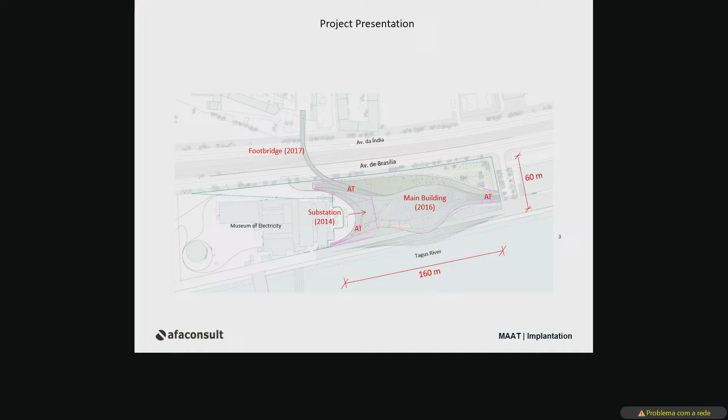So the first project I'm going to show you is the Museum of Art and Architecture, the MAAT, done with the office, the London office, AL_A.

And something happened. Maybe it's the idea that is not... well, clearly something happened.

Finished? Well, thank you very much. You can... Something happened, but I don't know what it was. Is it my computer that's not working?

This is... Okay, now it's showing the wrong one, but it's okay. Yeah, but it's showing the... Okay, no problem, but well, you will see it anyway, so okay, let's do it.

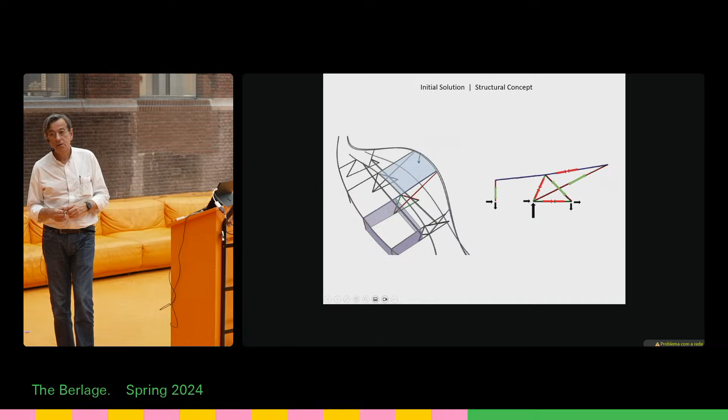Obviously, Amanda was not happy with the columns in the center of the room, but there was not any alternative, so we decided to study a different approach. We proposed to have a big truss in that alignment, a curved alignment, and with that big truss we could take out the columns of the room.

Everybody was quite happy with it, and we were also happy with that achievement. So this was the big truss in front of the building and the room with no columns.

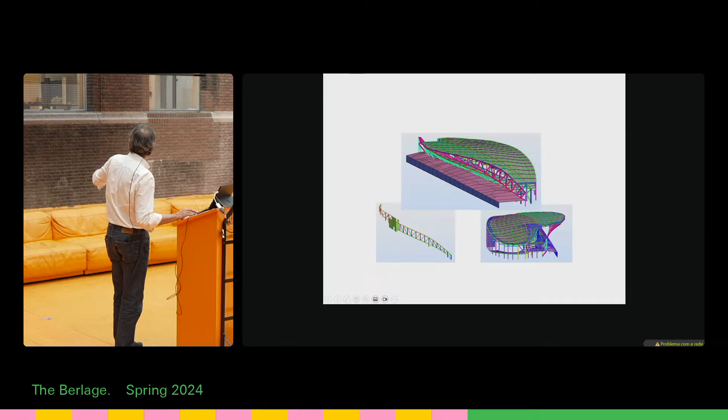But afterwards, they did the renders and discovered that the truss was in fact the teeth of the shark. Everybody began saying, oh my goodness, we can't do that, it's too obvious. And they said, Christ, what do we do now, if not even the teeth of the shark are allowed, what can we do?

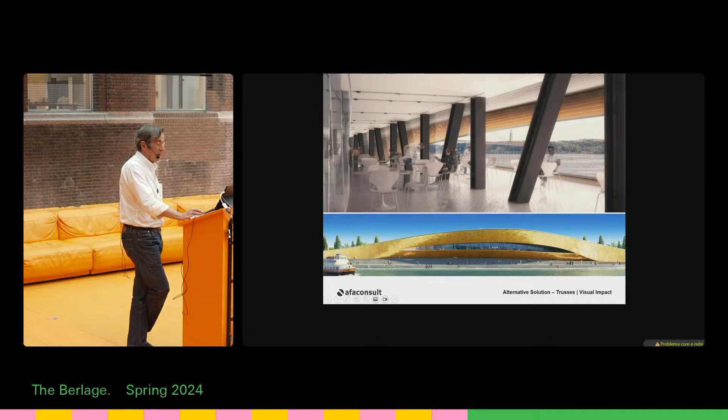Then we began again, and with the shape we discovered that there was one place where we could use an arch, a big arch, that could take care of and support the cantilevers. This is the architect's interpretation, but actually it's more than that - really to see if it fitted in the shape and if the shape would need something.

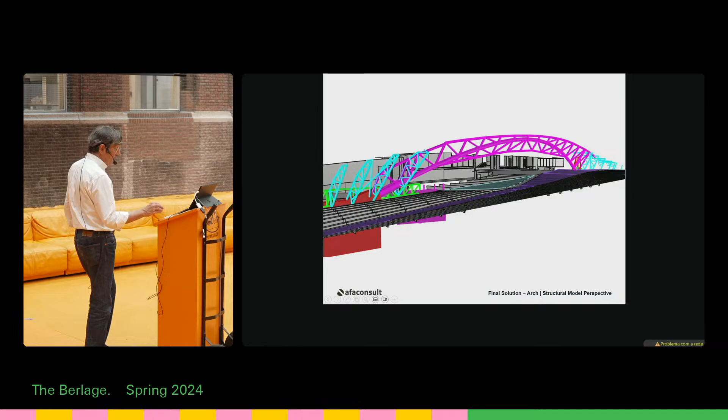And that's how it was done at the end, with this big arch. You will see some pictures afterwards. With this big arch, by changing the structure that way, we were able to free the mouth of the shark, and of course the interior, of any supports.

So this is a section done in the model where you see the oval room with no columns. The only support that we have is this one, and then you have the 25 meters span until the bottom of the cantilever. So this was the main thing.

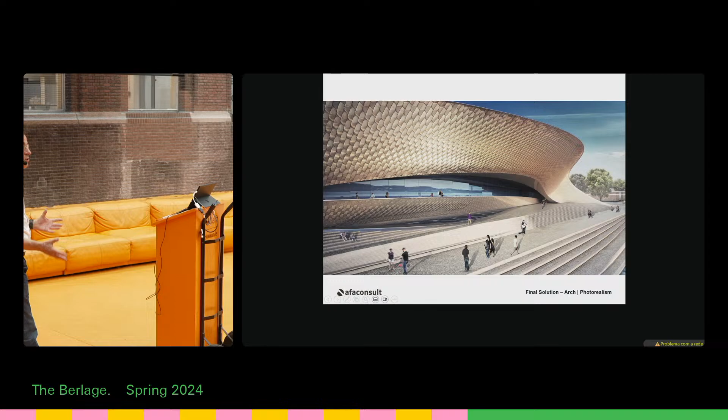Of course, a building with such a geometry is always a big challenge because geometry rules everything. But because of the height of the structure you need to do such a thing, services are not a problem - they fit everywhere, so it's not a big deal. That's why they're not represented in this presentation.

Well, this is just for you to have an idea of how the technical drawings needed for the arch, and some pictures of how the arch has been built. Such an arch, as you have seen, is around 85 meters span and 14 meters of height.

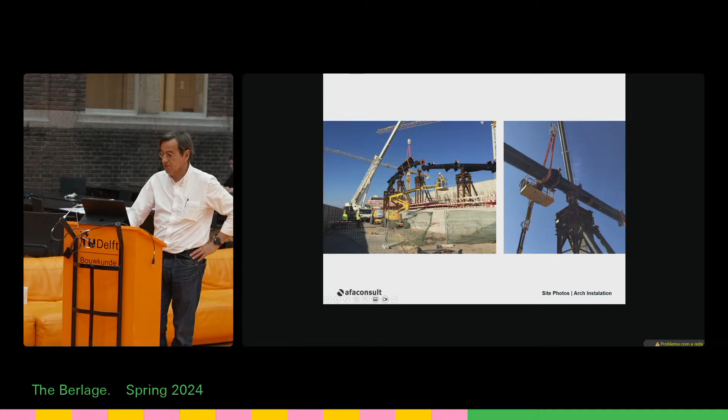So it's big. To build it, you need to have temporary supports that afterwards allow you to connect the several segments of the arch. And here already the arch, already being finished. The other challenge here in this process - okay, some more pictures.

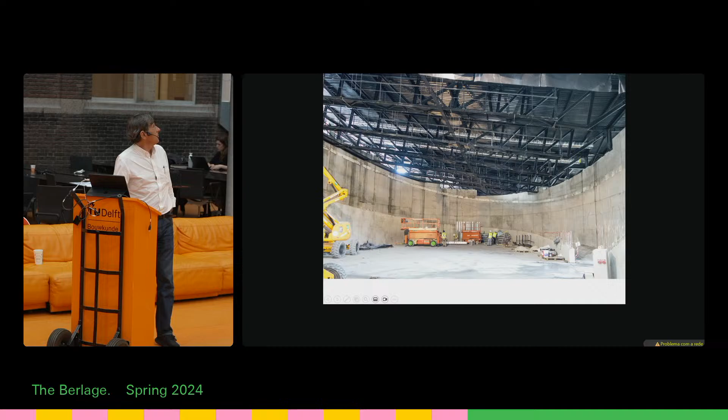I will go a little bit further. And the arch here - this is the interior of the room during the construction and finished at the end. This is another room, beside the big oval room, which has also that skylight, and that was also something interesting from our point of view.

The other part that was interesting here was the facade, because this smooth facade would need a material that could do the facade without many cuts and things. So it's a ceramic facade, and the problem with the ceramic facade is that it requires a very specific structure to support it - those small structures are all the structure that makes the first approach to the surface.

The surface - you get that surface in several steps, if you want. You first have the big structure, then you have a second structure that approaches the final surface, and then with the tiles and the regulation of the tiles, you get the final surface.

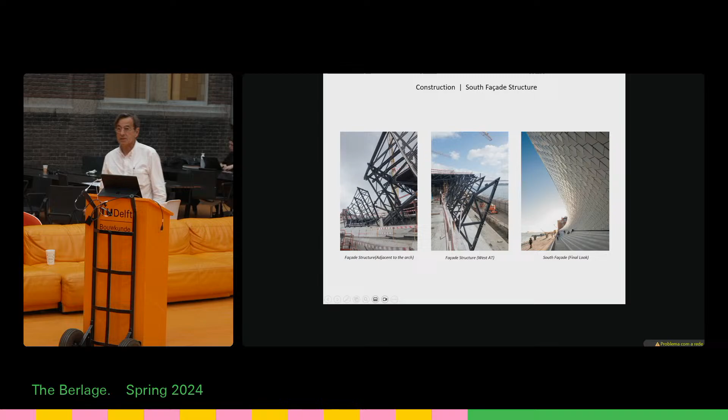That was it. So here, just for you to have an idea of the facade structure, which is massive, as you can see - not so strong, but massive in terms of needing a lot of points to support those tiles. Okay, some pictures of the rest, and that's it.

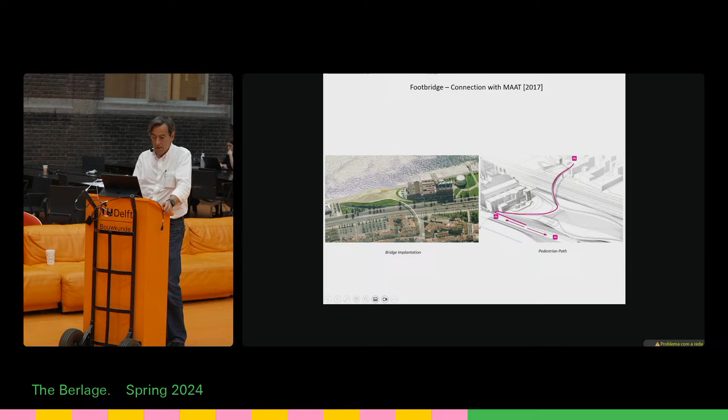Okay, so I moved to another building, completely different. That one was a museum, well, kind of museum gallery museum. This one is an office building.

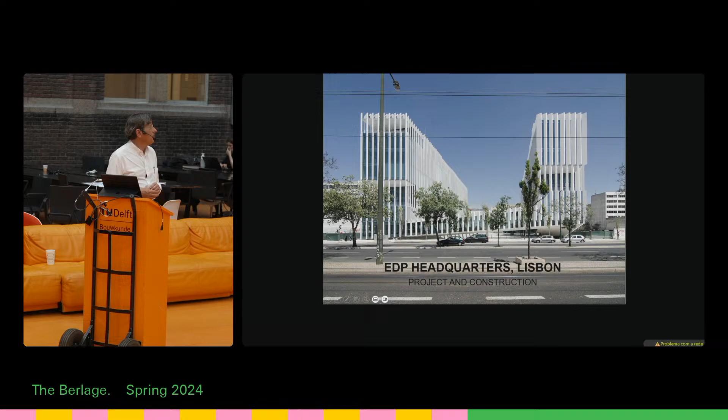This one was done with Manuel Aires Mateus, and it was a competition that we won together. Basically, it's the headquarters of the electrical company in Portugal, the main electrical company in Portugal.

So the idea here, as you can see, is that the river is on your left, and the whole city has been built in lines perpendicular to the river. And that is because not only of sight, but also of winds, so that the wind could ventilate the whole area.

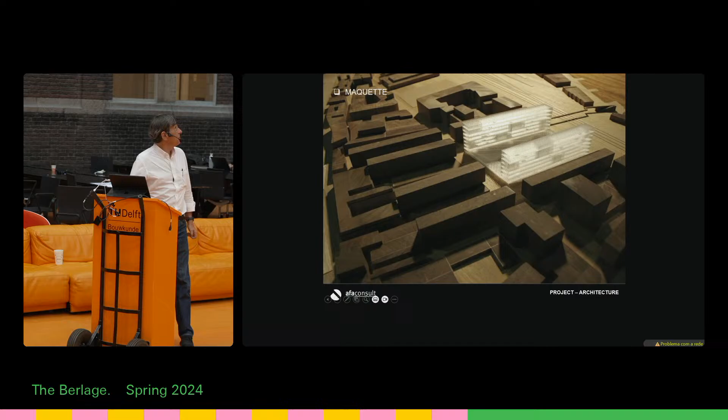So the idea from the beginning was to go along with that idea and have two separate buildings parallel, and make the connection underground between the two buildings. So this was it. Here you have the competition model also.

And okay, so the question afterwards, and here it's really the architecture working, is that you needed two ramps for the car park. So Manuel had this idea of

going up in both sides in opposite places, so that the ramps could get in. And that's the reason why you see those two places where the building doesn't touch the ground, because that's where the cars enter. Of course, this creates some difficulties, as you will see.

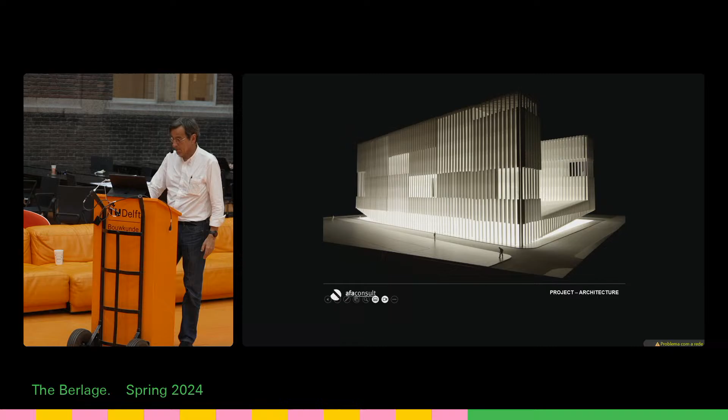Just an idea, you have the buildings, then you have the minus-one level that does the connection between the two buildings, and that's where you have auditoriums, cafeteria, and so on. And then you have car park below.

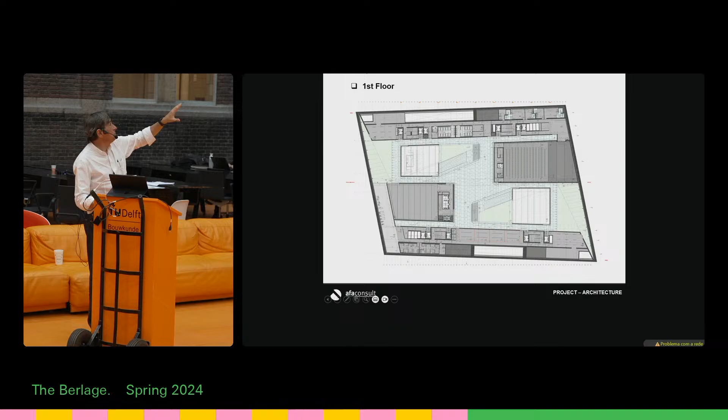On the ground floor, what you have is a big plaza, or public plaza. Everybody can go. But then you have these two stairs where you go down. And when you go down, you go to the reception if you want. And then you are distributed by the 4 cores, that are 2 in each building.

This is the square, the public square that you can cross in the city, and the upper floors. These buildings are 12 meters wide, and that's it.

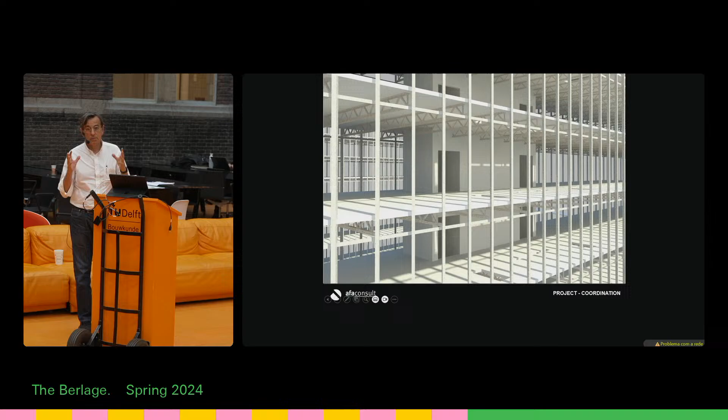Okay, so coordination, of course, the question is all about coordination, integration to avoid surprises, and to be able to put everything in. This building had a problem. It is 7-story high, and it had a level that we couldn't go over.

To put all the surface that was needed in a 12-meter building, because if you begin increasing it, you'd reduce the plaza, so it was not so interesting. So the idea was to keep them not so wide, and then we have 7 stories. But the problem is that to have 7 stories, we had to compress the package of slab and services.

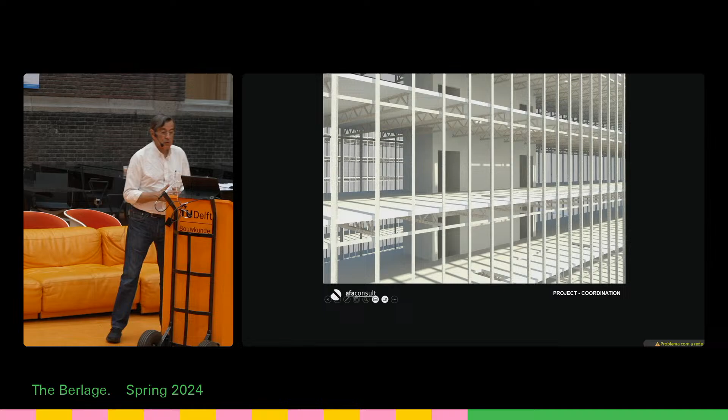So the question was, how can we do that, knowing that it's the headquarters of a big electrical company? They want everything, they want the comfort, they want everything that you can imagine. So the big challenge in this project was also to be able to put everything inside that space.

What you see here is obviously a Revit model of the installations, exactly to understand how they could fit. And the solution for the structure was to have these trusses, very light trusses, for the 12 meters. Because they are light, there's a lot of freedom in terms of passing the ducts and so on.

What happened is that to be able to have small ducts, you have to distribute the shafts so that you don't have big lengths. So there is a global reasoning for that, to be able to have small ducts, as you can see over there.

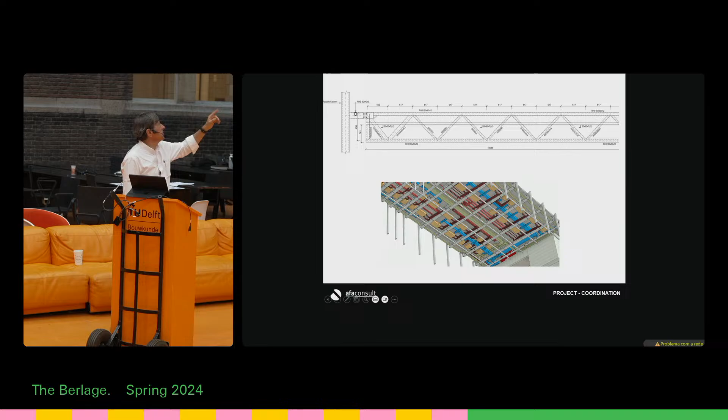What you see in the middle is that because the height was so small, we had to use the height over the pavement, the height for the structure, for the truss. So what you see there is that the slab is on that L that you have, and only the lower part is beneath, and the rest was covered by the false pavement, the raised pavement, as you will see in a minute.

So this was just a render of the concept. These trusses are spaced 2.4 meters.

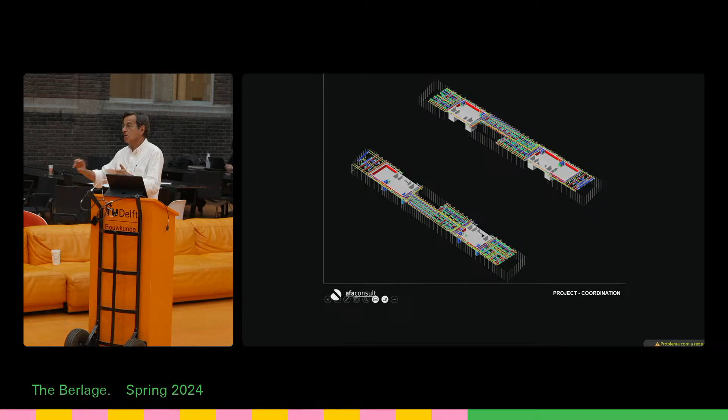So the Holorib plates, you don't need any more structure. So it's only the trusses and the Holorib, so that you could always keep the structure at its minimum.

Again, these installations, and this is, well, here you don't see it very well, but this is the installation at the end. There's nothing you can fit in that space. Everything goes perfectly, but it's the maximum you can have. You can't have anything more. Okay, for the structures.

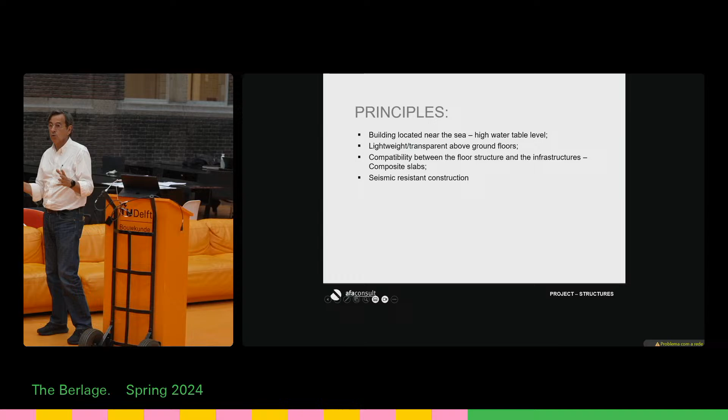Okay, that was the main drive for this project: lightweight, everything as small as possible, in a way that you can't identify exactly what is structure, what is not structure, and so on. And here we have the result.

What happened also is that we didn't want to have columns inside, not even in the offices. So the columns would have to be in the facade, outside, but they shouldn't be seen. So what we had to do was have as many columns as possible in order to have them as small as possible and disguised in the facade.

And so we've established a size of 10 by 20, rectangles of 10 by 20, or hollow rectangles of 10 by 20. But even if we do that, we have 7 floors, for 7 slabs discharging.

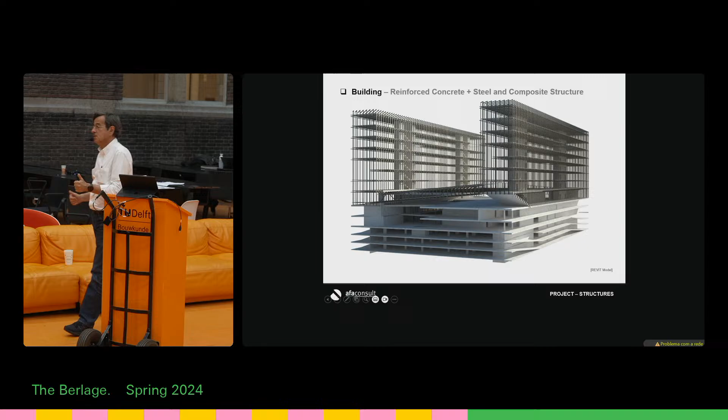So the idea here was to make something that, well, it's a trick, but it's used in architecture also. So you have the two trusses, and in the floor before, what we did, we skipped them. So in reality, these two floors discharge on these two columns, and these two floors discharge on these two columns. So what we have is the slab, the trusses are spaced 2.4 meters, but the columns in the facade are spaced 1.2 meters. So each column has half the load it would have if it was a normal structure. And by doing that, we managed to control the size of the columns.

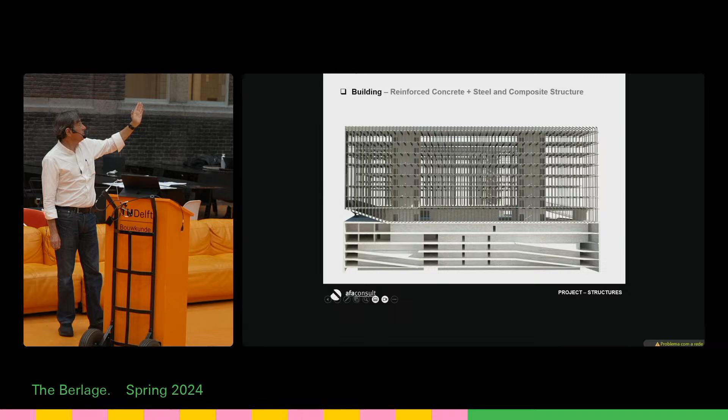And so this was really the structure. Here you can see what I mean. You have the columns, the 10 by 20 columns, spaced 1.2 meters, and if you look attentively to the trusses, you see that they are spaced 2.4 meters.

Okay, so the challenge here was, okay, building... No, this is important here. The problem with this lightness, the idea of the lightness, has to do with something else.

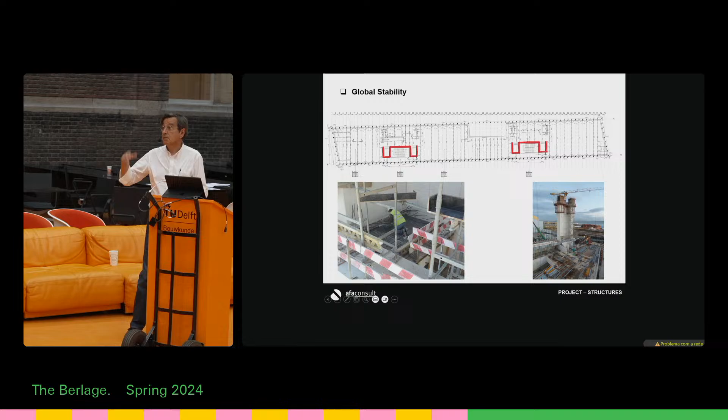We are in Lisbon. Lisbon is a seismic area, an important seismic area. So everything you can do to make a building lighter helps you with the size of the cores, because what keeps the building from falling down when an earthquake comes are the cores, those red cores over there. This applies to all the high buildings.

So the idea of having the building as light as possible was also to reduce the forces that are originated by the earthquakes. So here you have an idea of how it was built.

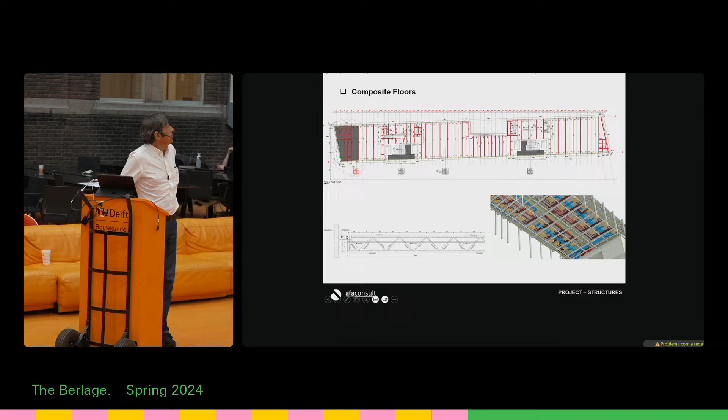So the cores were done up to the maximum height, and the steel structure was coming afterwards. So just an idea of how the composite floors were, and here the construction.

So here that's where you see that not all the trusses discharge in the columns in this floor, and then it's in the floor below and above that the trusses shift.

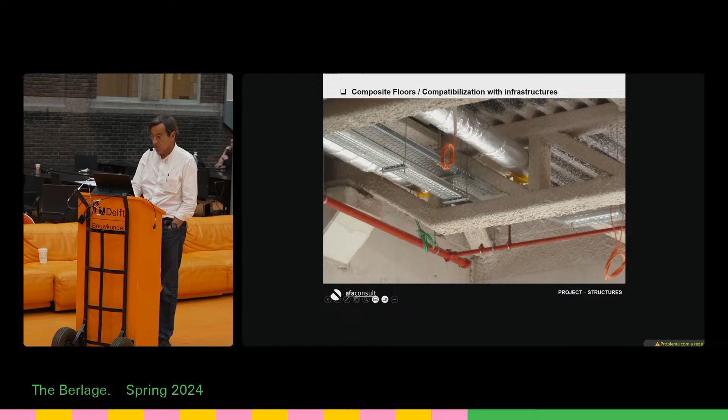Okay, some idea of how the fire protection was done, because at the end it was done with this, painted black, and so the ceilings are completely black and they are visible. You can look at them. Okay, so this is quite technical, not for you, and an idea of how the structure was.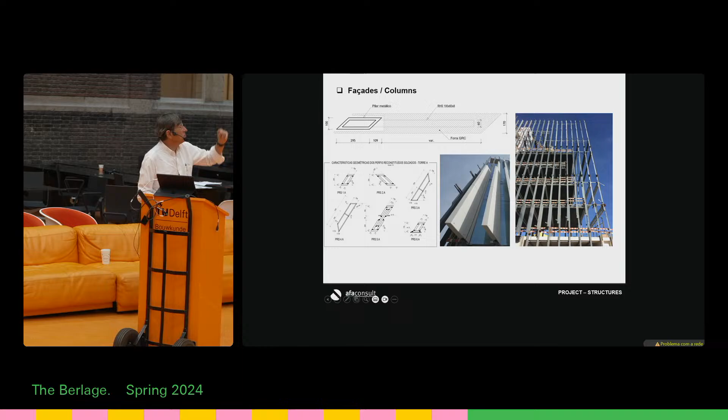Why did we choose the 10 by 20? Because at the end there were these sun shading elements done in GRC, and they should fit into those columns like that. So you couldn't increase the size, otherwise these elements couldn't be the same size everywhere. So what you see here is already the columns going up, and on your left you will see the GRC elements.

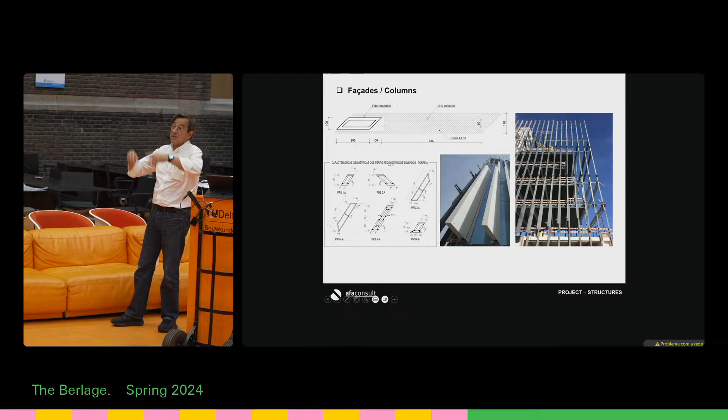Of course, the 10 by 20 also have a trick. It's just that they are 10 by 20 everywhere, but the width of the plate, as you can see here, is changing from top to bottom. So exteriorly the column is the same, but internally, as you go down, it will increase. So you increase the capacity, the resistance of the column, but you don't increase its size, which is what you are worried about, of course.

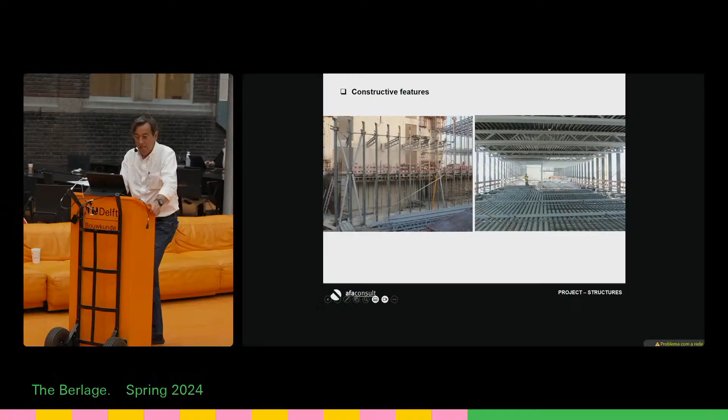Well, this structure, of course, the load is huge, but this is a structure one floor high, and it works, as you can imagine, with tension here and compression here, so there's not much to it. And some images of the construction.

It's kind of a filigrane. It was kind of strange at a certain moment, the bridge. Okay, let's speed up so I can show you another one, and this is already at the end.

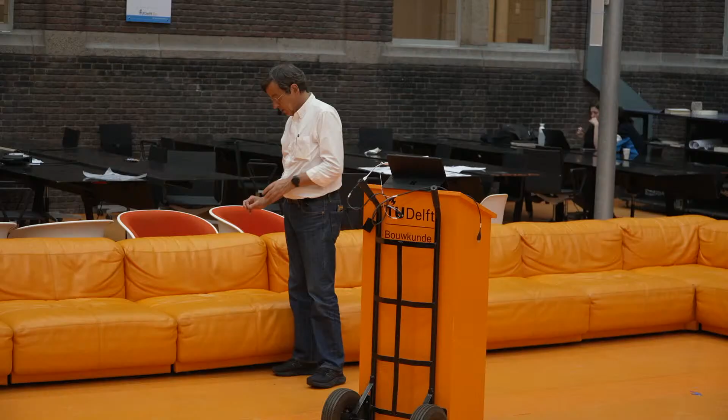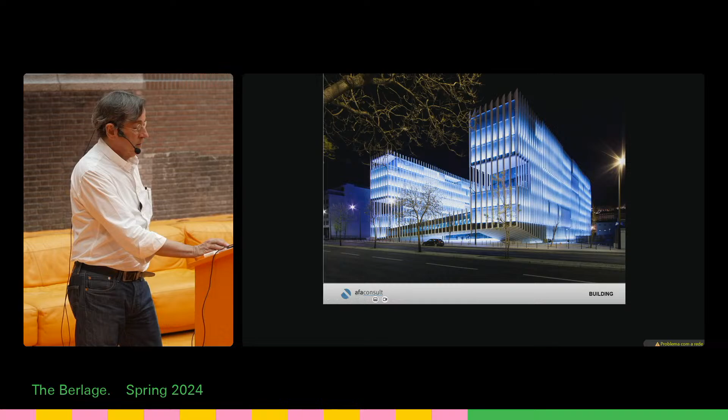So now I'm going to talk to you about another project with Manuel Aires Mateus, also a competition, one in Lausanne. It's about two museums, Mudac and l'Élysée. Mudac is a design museum. Élysée is a photography museum, a very important photography museum.

They have, among other things, the entire collection of Chaplin photography. So it's something important. But the big question was, they want a house for two museums that are completely different, because in the Museum of Photography you can't have light, while in the Museum of Design you want lights everywhere so you can see the pieces, like we are here. But the other one, no.

So this was the place. The building, the MCBA, the Musée Cantonal des Beaux-Arts, was already done, already built. It's another museum, and that was the site for our project.

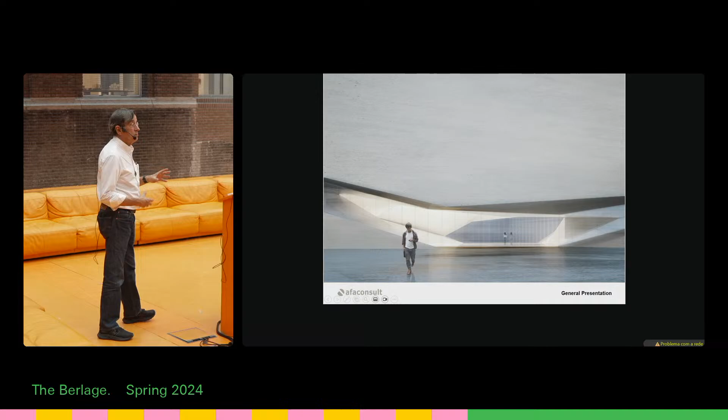Okay, again, this was the ambition: a square of 45 by 45 with one museum underground, the photography museum, with no light or very low light, and one museum on the top level for the design. In the middle we would have the reception, and everything you can imagine - shop, cafeteria, everything related to common areas in a museum. And this was the idea.

This is very nice, but the question was, well, the shape was born of a cube, a stone cube, cut in a way so that in the middle, with this common space, it was just a cut in two. There's a topography on the ground, and there's a topography, as you'll see, on the ceiling. Those two topographies touch only in 3 points. So you have a 45 by 45 building that touches only in 3 points.

So if you look at it, you see that this opening is continuous. You don't have any interruption in the opening. Nevertheless, this was the ambition for the competition, and this was the project that they chose.

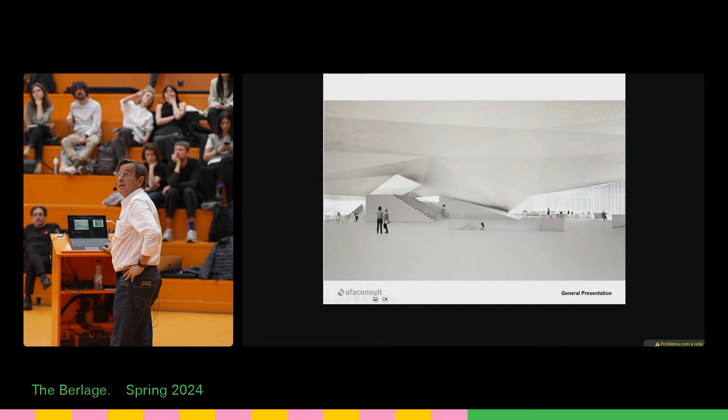Well, that window is a very good moment for architects. I'm going to explain what happened. Obviously, Manuel had the museum on top completely closed - there was no window, because in this kind of volume you can't imagine a window. How can you do a window in such a volume? It's impossible. So for him, there was no window, it was completely closed.

Then what happened is the client said, oh no, but I need a window, I want to see the view. The view is beautiful, I want to see it. And so the struggle was, how are we going to design a window in this volume that doesn't ruin the project? And it was unbelievably simple. It came from a mind that actually is not even an architect, but he was looking at it and he just said it - the thing was quite simple.

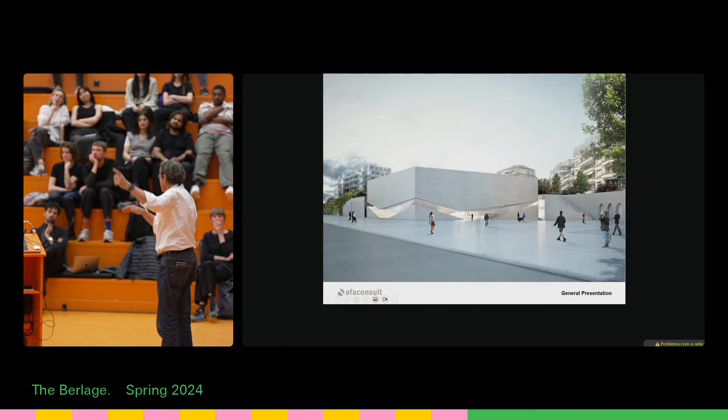You see that corner on the left? The only thing we did was to push that point up. When we push it up, you pass the level of the slab, and then you are able to do a window. It was really fantastic, because just by doing that, you push the point, then go over the slab and create this triangular window in the corner. All of us, including Manuel, were surprised, but we are saved, and that's why this window is there.

This level has a lot of light, as you can see. The ceiling is an important feature of the space, because it has light everywhere, and it's also the plenum that brings the air conditioning in, as you will see in a minute. Here is a section of the model.

This building is also, from a MEP point of view, very complex, because the demands of the museums are completely different, not only in the rooms but also in the warehouses. In the warehouses, you have rooms with temperatures and humidity that are completely strict, you can't change them. So the amount of installation and mechanical things is huge in this project. And joining another problem, we only have 3 points to connect to everything, so the placement for the technical areas was obviously a big problem.

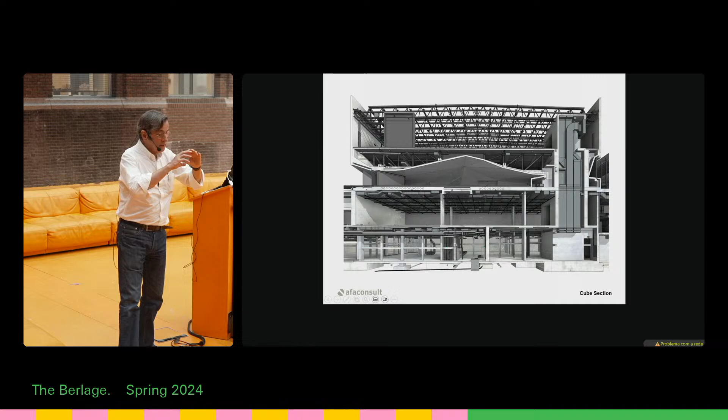The idea of the structure was that we would have a grid, all in white concrete, as you have understood. So the idea was that in that cavern, between the foyer and the MUDAC, we built a huge steel frame, a grid with trusses that help, that are part of the structure for the foyer, and get the loads of the big white concrete walls in the perimeter.

So this structure is the main thing. This structure is supported by those 3 points, and this is what supports the whole building over the ground.

Obviously, this slab that you have in the foyer was used with its capacity of working as a dome, if you want, because at the end of the day it has that shape. It has some kind of complicated geometry, but the result in terms of forces is that it can work as a dome. So the steel structures and that slab work together, and that's what gives the stiffness and the resistance to the building.

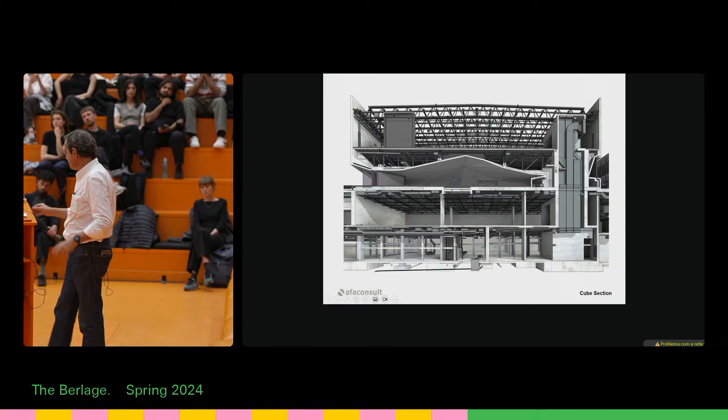Then you have those walls, and those walls support the roof, which is a shed roof with a 45 meter span. The structure on the Élysée Museum, which is the second floor over there, is not as complicated because it has more walls, so we could use more columns. And then on the bottom you see the level where you have all the warehouses and the depots and everything, where the pieces are normally kept.

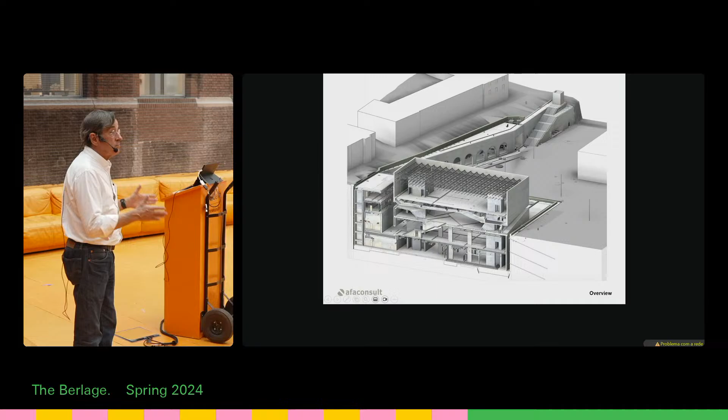So this is a section in the other direction. I didn't mention, but it's also important to mention that this strategy of the project isolated the building of the museums, of the rooms. By isolating those areas, you had to put offices, administrative workshops and so on around, and that's what you have. What you have here on the left is kind of an annex where everything that is not exhibition spaces is. So you have this idea of annex that is so present always in architecture.

So that's what you see here, again, another section. You have the buildings and workshops here. There, with those arches, you have the restaurant, and here you have the MUDAC, foyer, Élysée. On your right, there is a patio that is where the light comes to the Élysée.

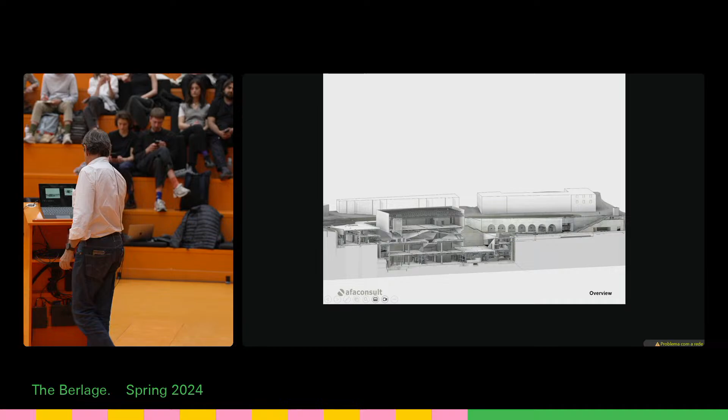Okay, so some pictures more of the annex, the building A, and then the complementary program on building C. Some things boring, white concrete, gray concrete, but okay, you understood that. This is again a part of our project, but again outside.

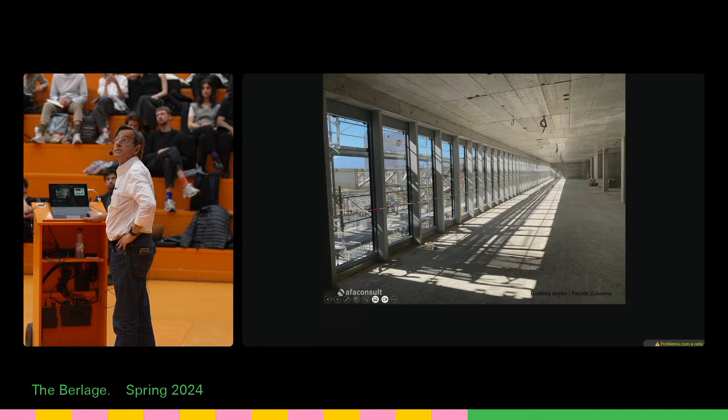Offices, and this is the main concept of the structure. There were two challenges here: one was statics—how do we do that—and the other was how to build this. Both were a big challenge.

From a construction point of view, that's how it was done. You did first the upper part, and then we did the topography below. This is again something interesting—what happened at a certain moment, the building began with

concrete structure, as you have on your right, on your left. And this concrete structure, because we are in a very cold country, but at the same time the wall is turned south, so the sun is very strong there. We couldn't have, or we were not willing to have the structural wall exposed to the sun and cold, because those temperature changes could open cracks in the concrete. And when you are working in a place with snow and ice, it's dangerous, because the water comes in, opens it, and the concrete begins cracking and being destroyed. So we didn't want that.

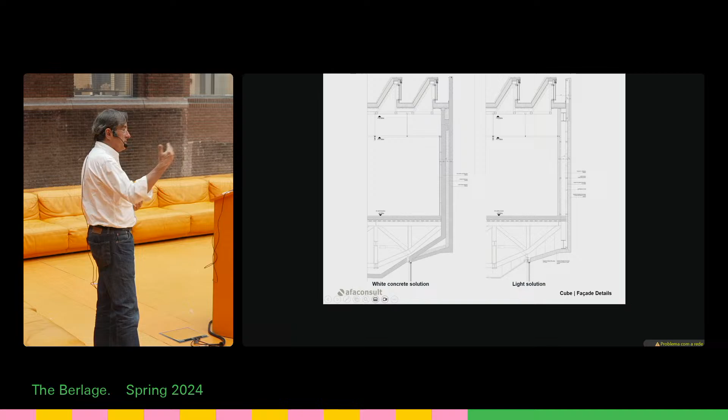Typical thing in a project like this: the contractor began raising doubts, delaying, prices were out of budget, and so on. So we decided, okay, let's change everything and propose a light solution.

We said, okay, we can do that with what they call crépi, with a kind of Aquapanel or something like that—you get the same shape, the same volume. Well, that was very good, because it was not accepted, but so it was not our fault. We proposed that building, of course it wouldn't be so strong. Concrete is something that is obviously appealing, so that solution was developed mainly as a strategy from our side to push them toward the concrete, and that's what happened.

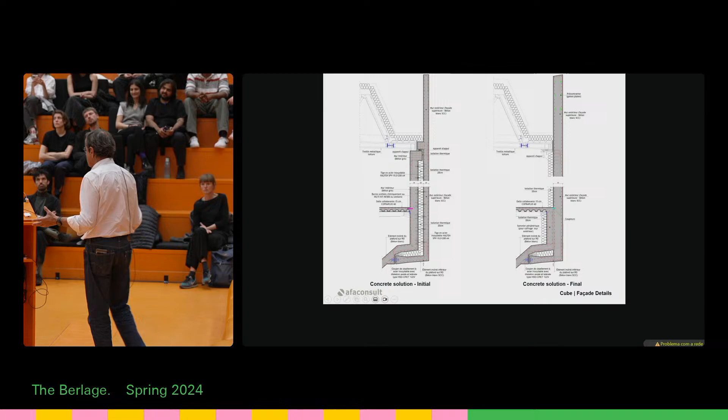So the solution changed—we changed it for another option. The structure is actually outside, but of course lots of care had to be taken to ensure we don't have cracks. So we went from the initial solution to the final one. The first solution had the insulation completely outside, so it was much better. The second solution obviously gets cold bridges, and we had to treat them, so it was much more complicated. But at the end of the day, it has been possible, and it's working.

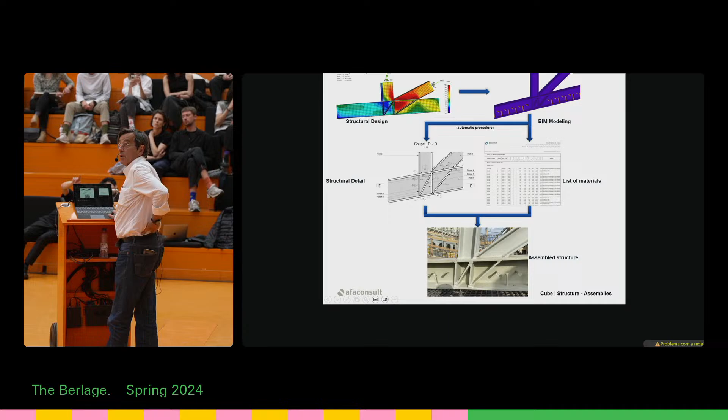Just for you to have an idea, this is how much steel goes into those slabs, and this is a knot of one of the trusses. So this was the sequence of construction.

First, we put some temporary supports for the grid of trusses, then the grid of trusses, then the cores, and that's how it was until the end. Now I'm going to show it.

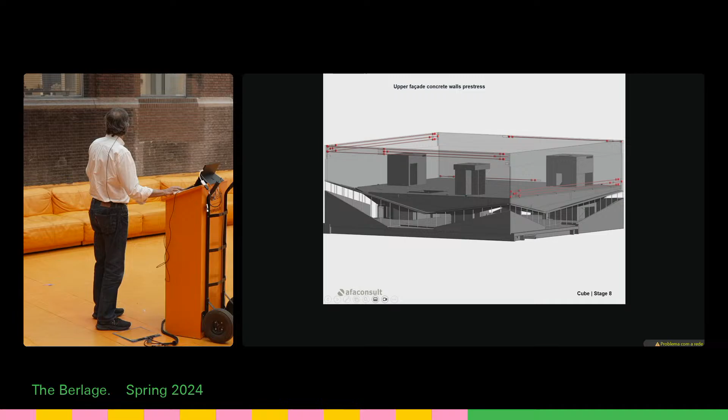This is the pre-stressed cables we had to put to control cracking. This is a picture of the roof, of the trusses, and how they enter the cores, because the problem is always, when you have steel structures meeting concrete structures, making the transfer of forces is always a theme.

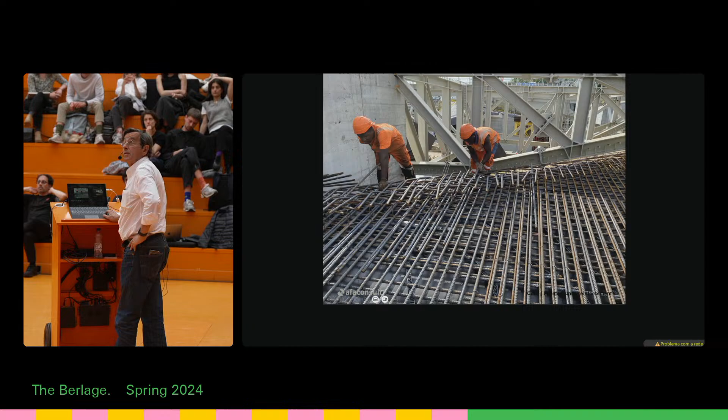It's always a problem. So we had to enlarge the concrete there—now we have 80 centimeter wide walls in order to be able to fit the trusses inside. There's the iron, and this is the cavern between the two, the foyer and the first floor.

The problem here, interesting also for you: when you enter and look at the ceiling, it's concrete, and you have the shape of the shuttering. But on surfaces like this one, you don't have shuttering, because you can't—the slope isn't enough to have shuttering on top of the concrete. So the finish at the end is different.

So when you enter, you want the whole thing to look the same, but it's not, because the floor finish is not the same as the ceiling. Well, in the end, they did a very good job making them as similar as possible.

Those props were there until more or less the end—that was the last thing to take out, because when you remove them, that's when the structure began working. It was the last thing.

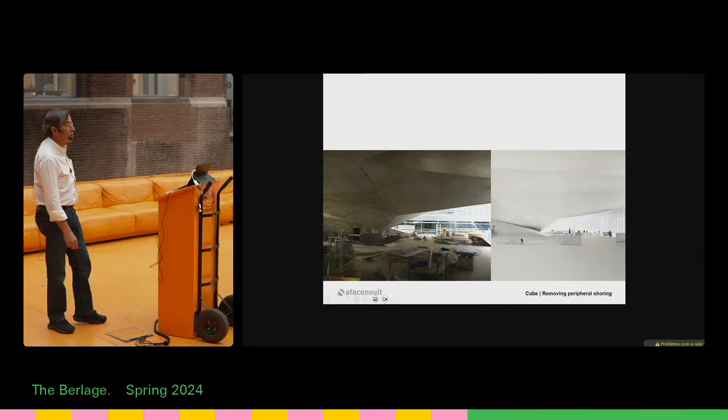The funny thing here is that the deflections we calculated were not even attained—not very different, but they weren't. This picture is funny, because this was the image from the competition, and on your left you have the result at the end. And it's not very far off.

This is the corner, the free corner, the props. So this is good for engineers, so I'll speed up a little bit. Now I'm going to speed up just for you to have an idea. This is quite complex mechanically. I'm going to skip that, but I'll show you just one thing.

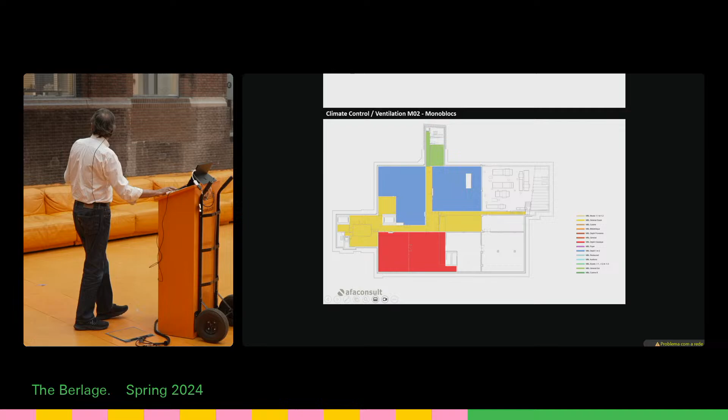These plans define which area is treated by which air handling unit. Because the conditions of the spaces were completely different, you had to have different air handling units for each space, and as you can see, there's a lot of them.

And then we're going to see the technical areas, which is something you always forget. The architects always put technical areas anywhere, and in the end it's a nightmare. And look, this is how full this thing was.

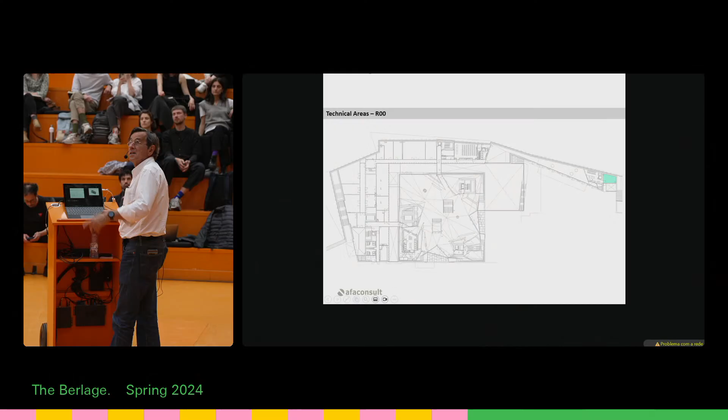This is always the same, and this is the only way to do it. The only way to do such a project is with Revit, have everything modeled, and check everything in the model, because otherwise it's crazy. You just can't.

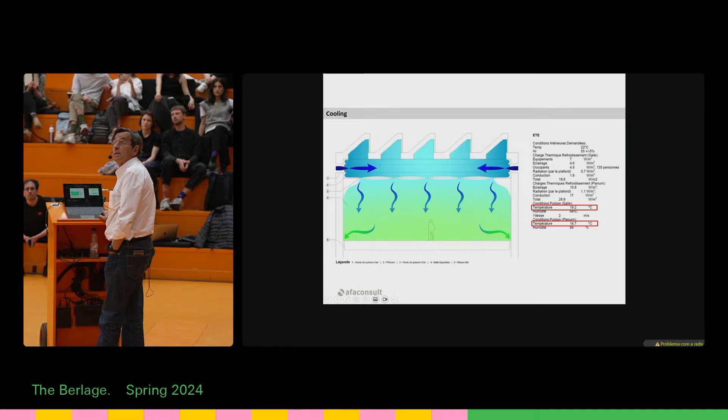So just coming, some spaghetti, and that's it. No, this was crazy. This project was really something. This was the inspiration for the ceiling: the Kunstmuseum by Kerez and Morger Degelo.

And the lighting also, well, the lighting is obviously another problem. The biggest problem was the foyer, because in the foyer you couldn't have anything in the ceiling, no projectors or whatever. So how are you going to do it?

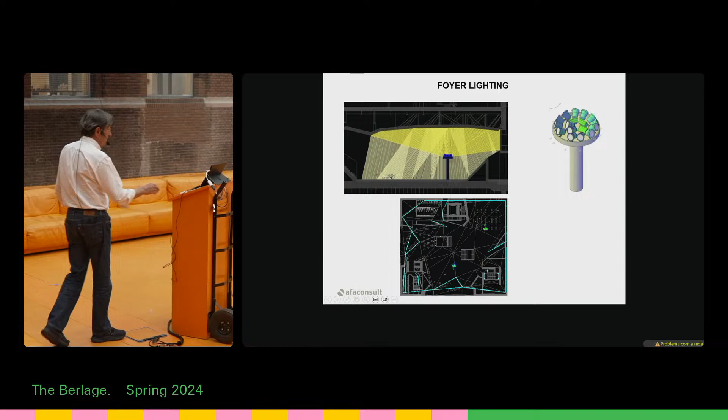So we decided to put some totems full of projectors, and tested it first, and in the end it worked quite well. And the light is nice, is very nice.

Okay, water, that was a fight again, because we had to put the water inside the space, there was no way we could have the pipes outside. So what could we do? But it was a fight with the Swiss, yeah.

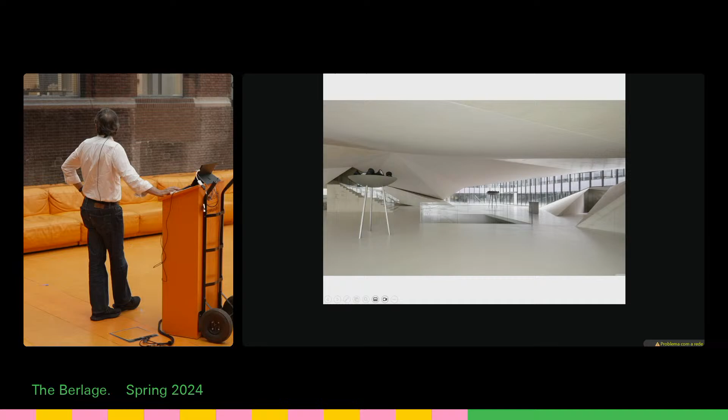Okay, so final models, and that's it. Final images with the lighting poles, the stairs coming down and up, the big room, and the window.

Okay, so that's it. Are you sleeping? No? Not yet? Okay, I'll put you to sleep now.

Then, the next one. This is another building for the EDP electrical company. This one is a continuation of the first one. It was done with Elemental, from Aravena, Alejandro Aravena, and it was a problem from an architectural point of view.

Because when you arrive and you have something like the other one, as you've seen, you have a situation. How am I going to respond to that? Because in fact, that's what it is. So the other building was quite light.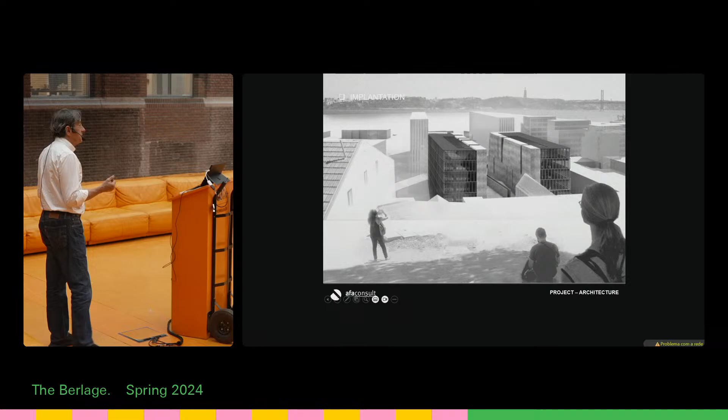It's all about lightness, and so Alejandro decided to have something more in his line, heavy. So his idea was to respond to that plaza, the same plaza, to do another plaza, but with a completely different feeling. While you have one plaza that is light, completely volatile if you want, he decided to do something much more heavy, with concrete, the kind of concrete he uses.

We tried to do the kind of concrete he uses in Chile, which is a not so sophisticated kind of shuttering, so that you see the wooden planks and so on. So this was his idea, to do a very heavy plaza and then open the offices to the exterior.

But the idea and the concept is exactly the same: you have two parallel blades connected, not at one level, but connected at ground level, as you can see there. And then below, you have the car park, as in the other one.

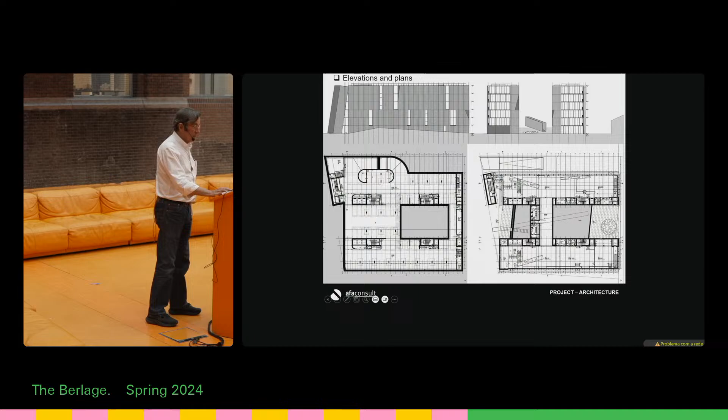This is not so high, so this is 1, 2, 3, 4, 5 stories high. And what can I say here? Not much more. Okay, so there what we see is really the idea of the concrete, his idea of the concrete, that is a very rough concrete that sends us to something very powerful.

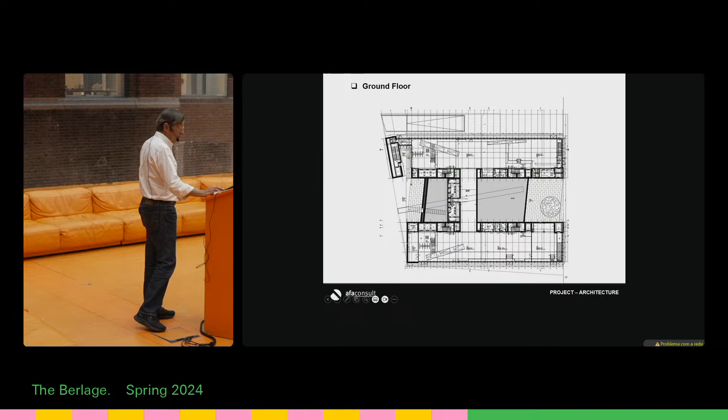The plans, all the services are concentrated in this strip, in the concrete strip if you want. And then after the concrete strip you have the light building, not so different from the Aires Mateus building. But all that, everything is there: toilets, technical rooms, even some meeting rooms, lifts, and so on.

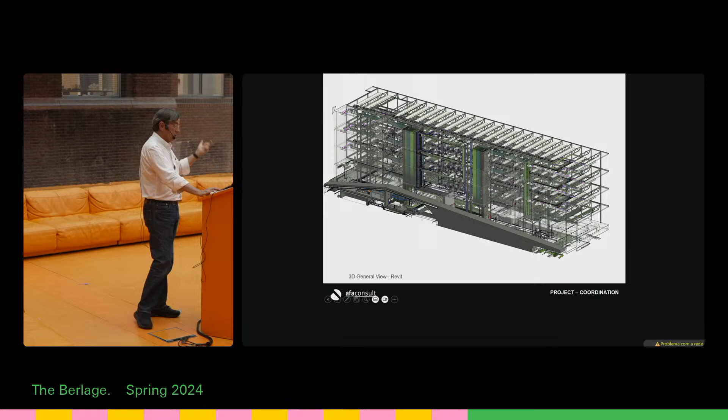Okay, so here the issue of the services was also quite complicated, but as we had the other before, and here we had more height because we only have fewer floors, it was not so complicated as in the other one, but it is a little bit. So here it's all about coordination, design coordination.

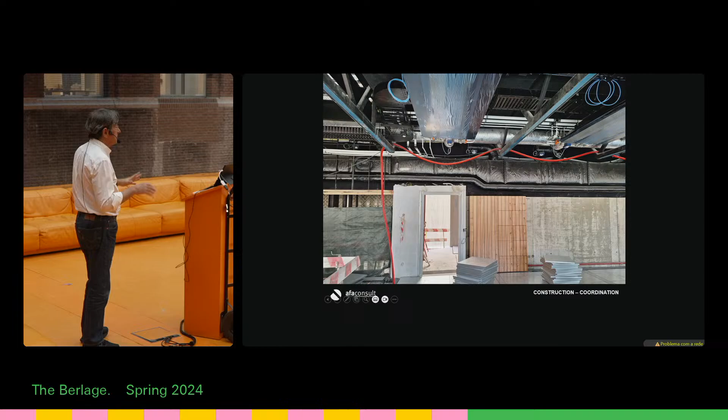And here it's already to the logic. The logic of the building is more or less the same. What we have is these trusses that worked very well at EDP, so we repeated those. They were used to that, so we did the same, and all the services are visible on the ceiling. The air conditioning system is different, it's these active chilled beams. And of course the rest of the project, this is ground floor.

For the structures, the question was, okay, as we have those huge concrete strips, the building for horizontal forces is perfect, no problem. So the question was only the rest, because those cores are strong enough to take care of horizontal forces. Okay, the boring part.

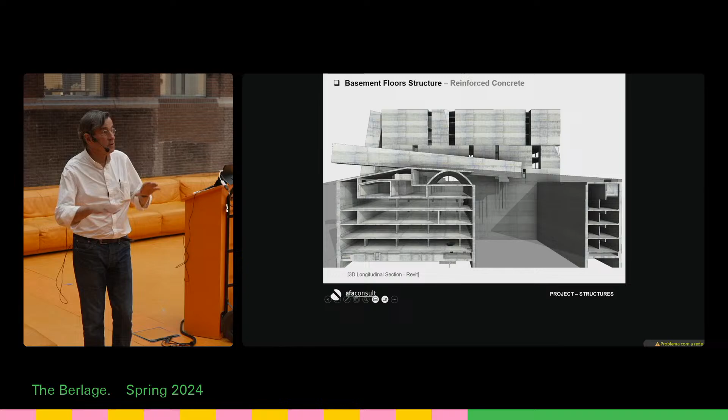Okay, so excavation, this is just a sequence of construction. Here you see that the connection between the two buildings is a kind of tunnel, a parabolic tunnel that connects the two buildings, and it's put in a way that that thing over there, which is kind of a mirador, a sightseeing place, goes over and is supported actually by this tunnel.

Some pictures of the basements being built. Here the funny thing is that Alejandro played a little bit with the way he builds in Chile, because obviously South America is kind of different in terms of construction. There are lots of demands that in Europe we have, well, some countries more than others, but there are lots of demands that for them are not important at all.

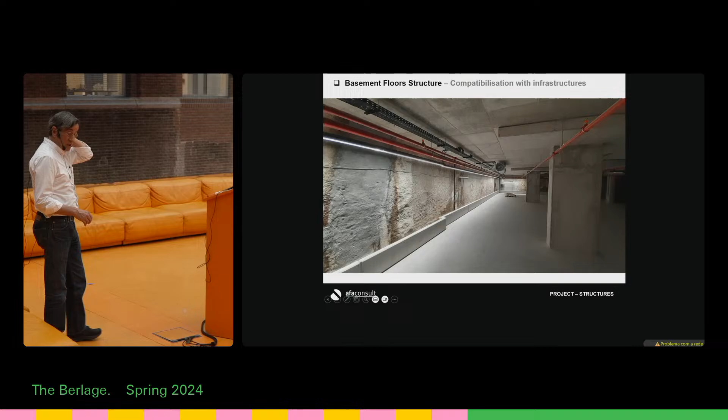So here it was planned to have an interior wall in the excavations, in the basements. But when they excavated, they looked at it and said, why don't we leave the walls visible inside? We just do some kind of gutter or something for the water that may appear, but let's leave it like that. And at the end of the day, that's how it is. It is, and actually, it's beautiful.

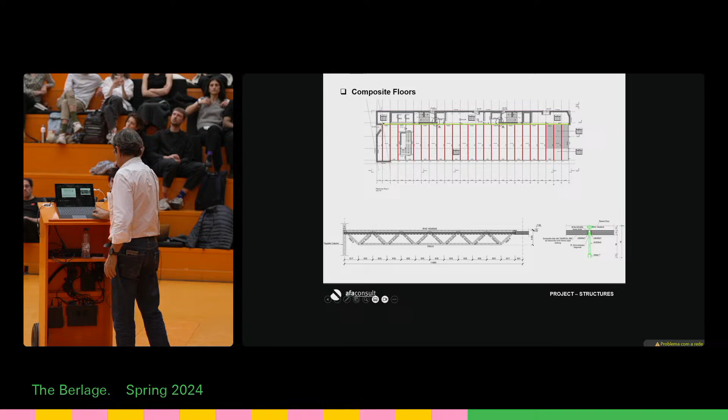So some construction, not so nice. Here you see that it's exactly the same system as the other one with the trusses, and the slab just under the false pavement, the pavement that covers the building. And here you begin looking at the result.

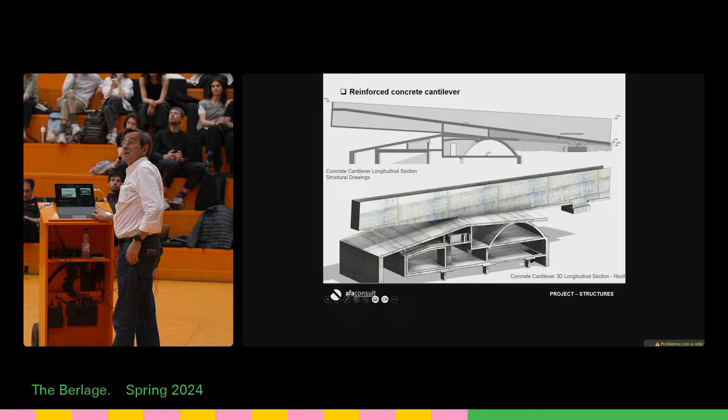The idea of the columns is exactly the same, also the same size, 10 by 20. And okay, services. Here you have this cantilever, this big cantilever that is being supported in two moments, and it's a kind of a mirador inside the plaza. The tunnel.

And here the slab, the landscape is not yet done, so it's quite high. And these are final pictures.

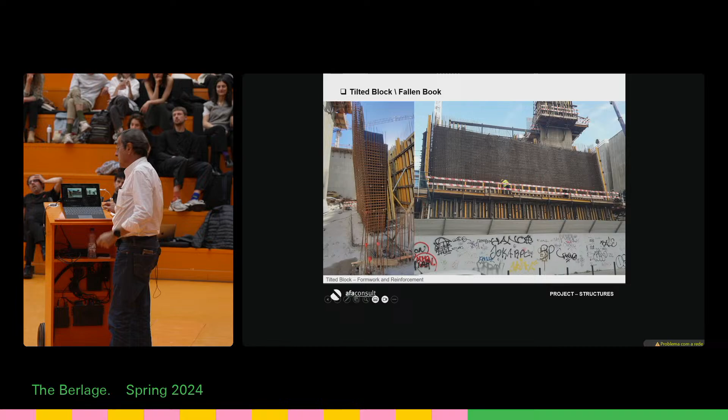The other challenge for us here was this volume, because again, Lisbon is a seismic area, and this volume, this mass vibrating, was a problem in terms of touching the other building. So this is during construction, and this is exactly that corner that supposedly touches the other volume. And this, from a structural point of view, that was also a big challenge.

Okay, so this is some technical areas for you to see, and as you can see, the concrete walls are visible, and it's quite funny.

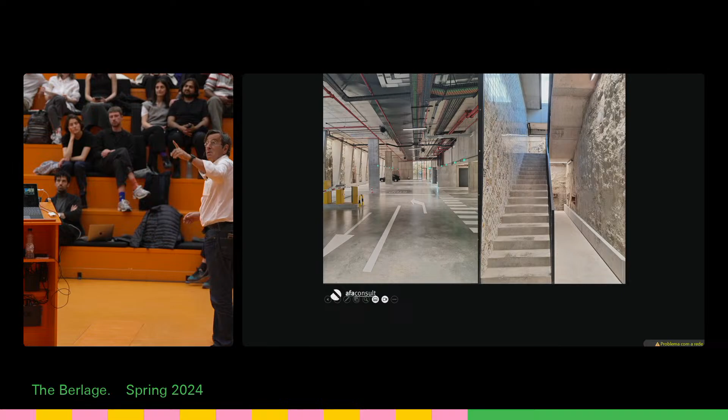The only thing I'm not showing here, because I don't have those pictures, is that on your left you see this wall is completely covered with tiles, Portuguese tiles. And not only this wall, even the lift shafts are completely covered with the tiles. What they did, because it was done by the best company, which is not cheap, is they chose the tiles that were there for ages that nobody wanted. So he chose all of them, and with them he did kind of a patchwork. And it worked quite well. Actually, it's interesting when you look at the shaft and see the whole thing covered, because the lifts are in glass.

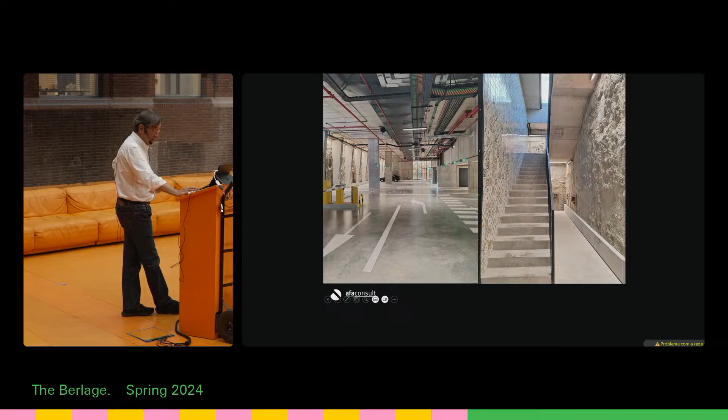Okay, so... 42. That was it.

It's like my computer, it's the same problem.

Thank you very much for the interesting lecture. I was wondering, if you were to go back in either of these projects, is there something you would defend as an engineer to the architects? Like a specific element of the project that would also reflect its design?